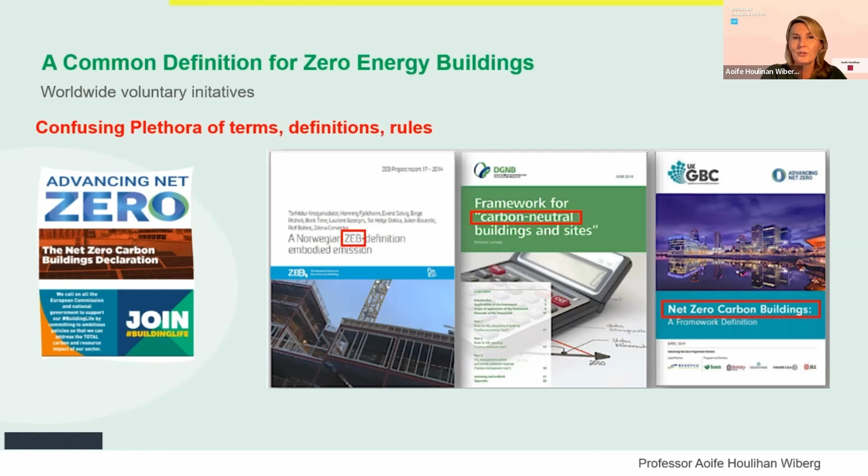So I just want to begin by saying the recent IPCC report stresses that to remain within 1.5 degrees, we need to reduce greenhouse gas emissions by almost 50% by 2030 and reach net zero by 2050. So a climate emergency has been declared. So the need for addressing whole life emissions towards net zero is emphasized in many schemes worldwide, whereas it's leading to a confusing plethora of terms and definitions.

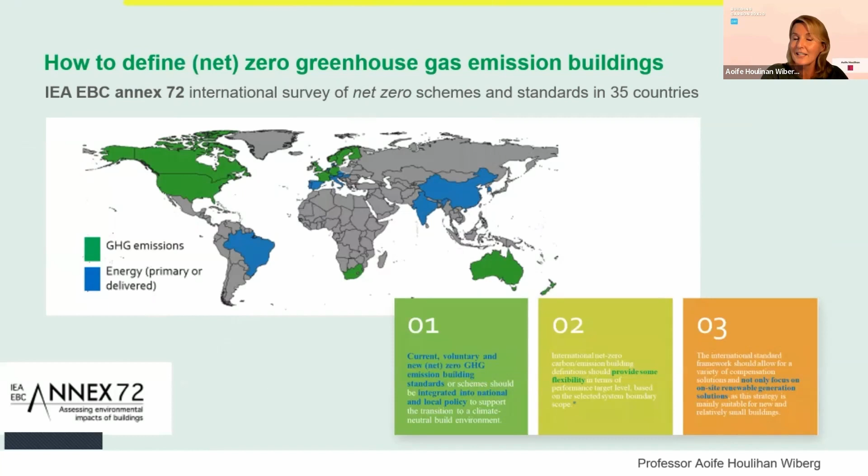So to address this confusing plethora, we in the IEA Annex 72 have conducted an international survey of net zero schemes in 35 countries worldwide. What we see is that energy is still the primary metric in 60% of those schemes, yet 40% have now shifted to greenhouse gas emissions. So I just want to share with you some of our experience from the Research Centre for Zero Emission Neighbourhoods and Smart Cities. So basically a Norwegian approach to achieving a national goal to achieve net zero.

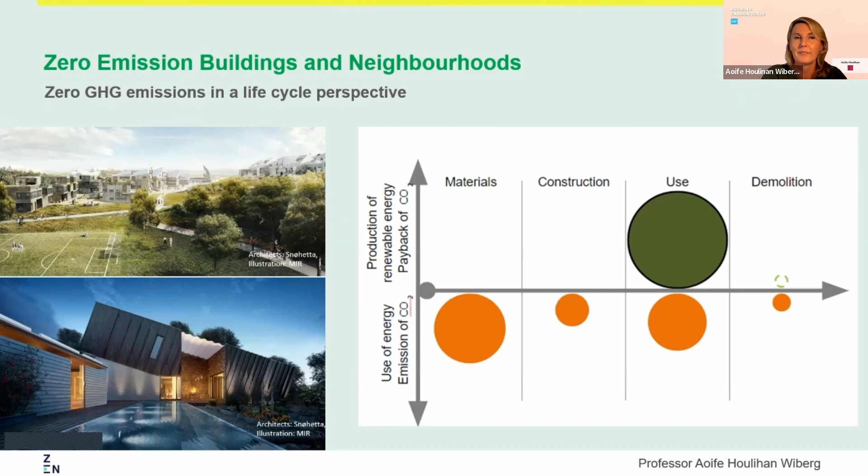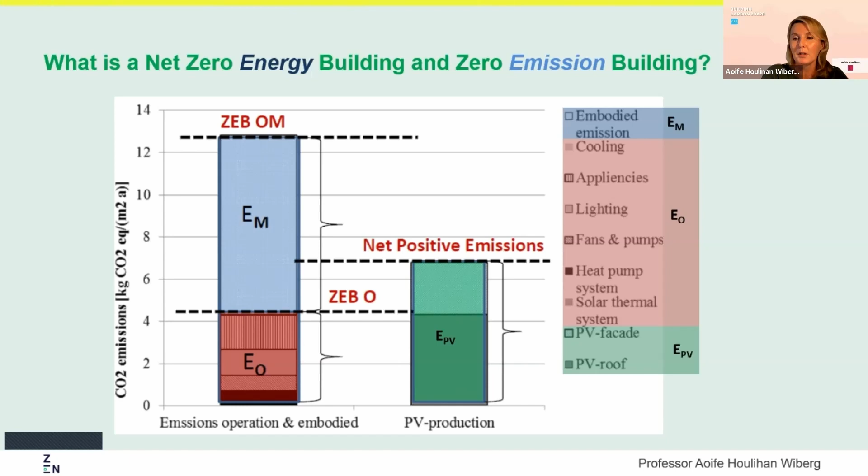So the vision of the ZEN Centre is to create buildings and neighbourhoods with zero greenhouse gas emissions. So effectively, emissions from renewable production must balance embodied emissions and operational emissions across the whole life cycle of the building. So a net zero energy building produces the same amount of energy as its demand. So the green balances the red shown in the graph. A net zero emission building, the balance is measured in terms of greenhouse gas emissions across the whole lifetime of the building. So it's including the blue part, embodied emissions.

In recognition that we're not all at the same scale, that went very fast, we created the ZEB Ambition Levels across the whole life cycle of the building. So it goes from the lowest, which is a balance for operational emissions, right through to the end of life.

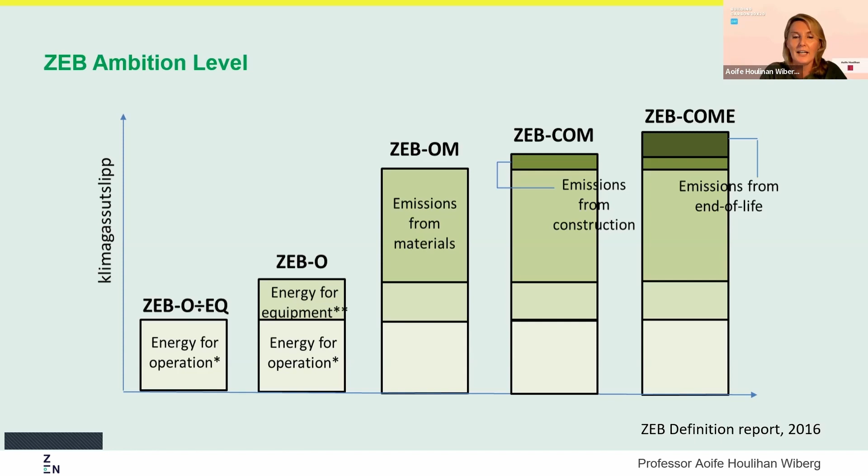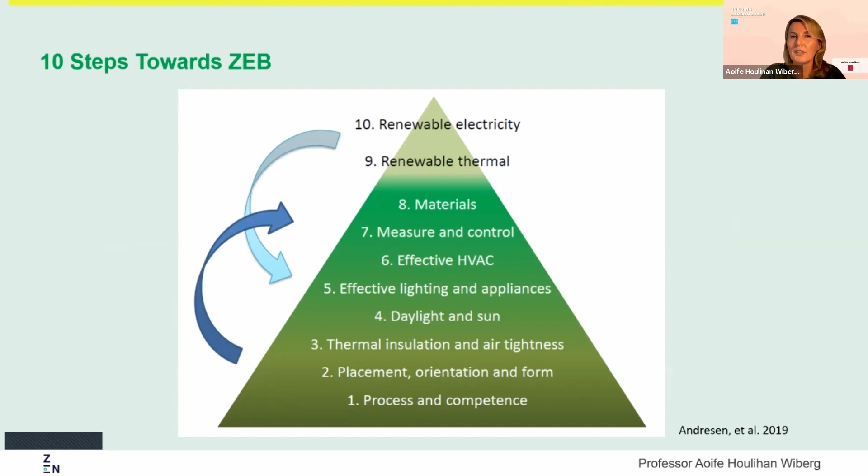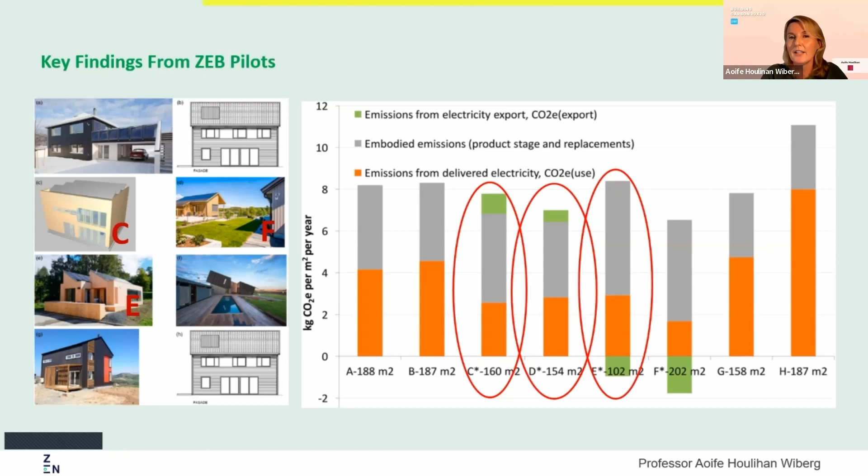So in terms of developing our ZEB pilot projects, we also have developed a stepwise approach based on Trias Energetica. But the key emphasis is always on passive design strategies, reducing energy as low as possible, and then balancing that with renewable technologies. So the importance of including embodied emissions is actually found in the results from our ZEB pilots. So we have 8 pilots which are built, and what you can see here is the orange is the operational emissions, and grey is the embodied emissions from materials. So we see a 70-30 split.

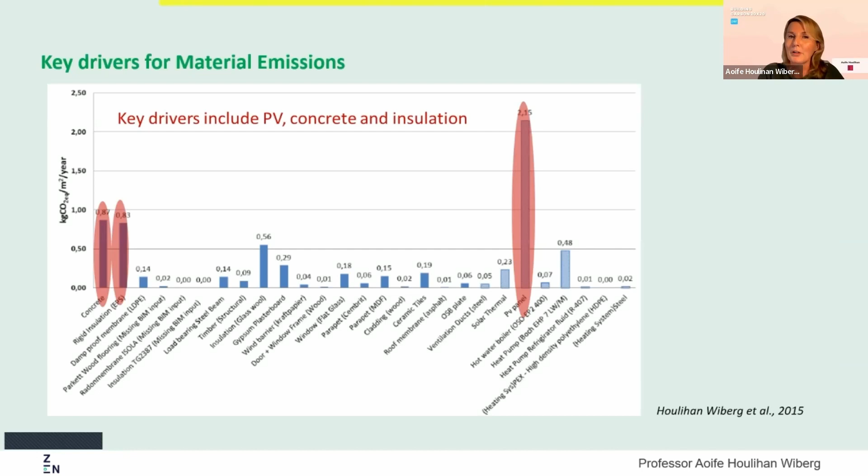Another interesting finding was that across all the ZEBs, we see that the key driver for high emissions was the PV, the concrete, and the insulation used. But obviously, as a designer, you need the PV, but you can reduce emissions across the other materials.

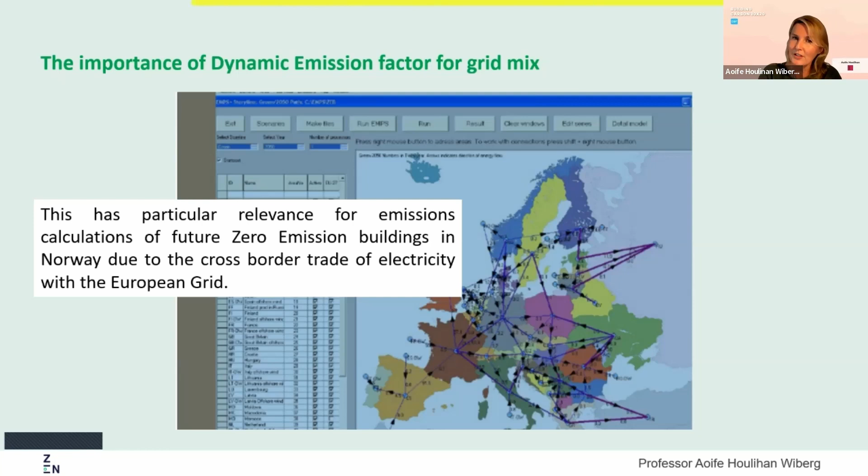Another important fact was that we needed to use dynamic emission factors for the grid mix, because even though Norway is almost net zero emissions for the grid, there's considerable export and import across countries, and we need to consider the future decarbonisation of the grid mix. So basically that slide is showing we need to consider the export and import of electricity in and out of the country, right through to Europe and back in again, which is higher carbon, and the future decarbonisation of the grid. So we use a ZEB emission factor.

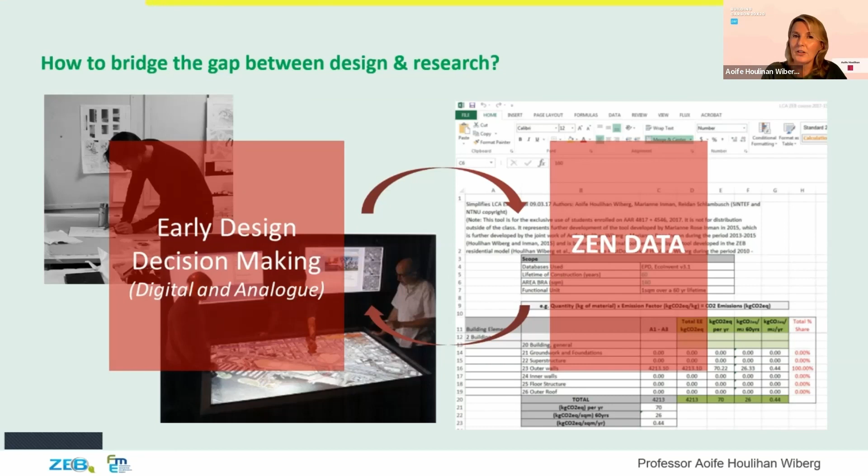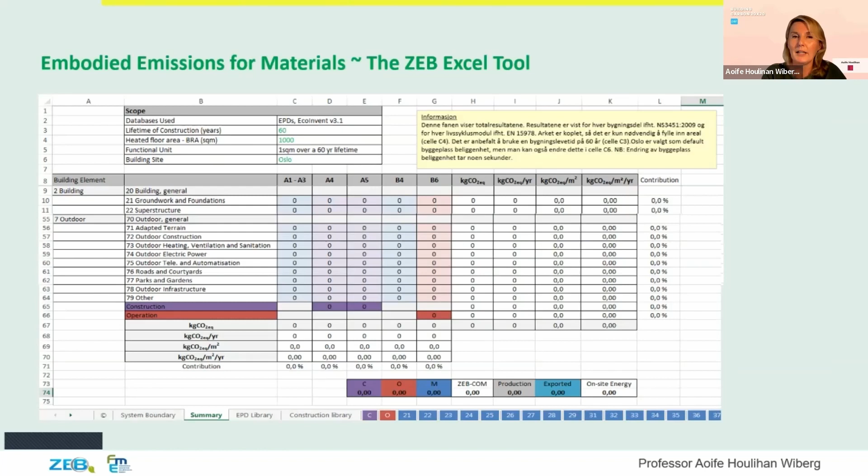So how do we bridge this gap between design and research? So we need to really find ways to use technology and to integrate robust calculation methodologies into the design tools. So over 10 years ago, I can't believe it now, I started with this development of an Excel-based embodied emissions tool. This is just showing version 1 of it. But this was really useful for us. Instead of having a black box approach, having the Excel allowed us the flexibility.

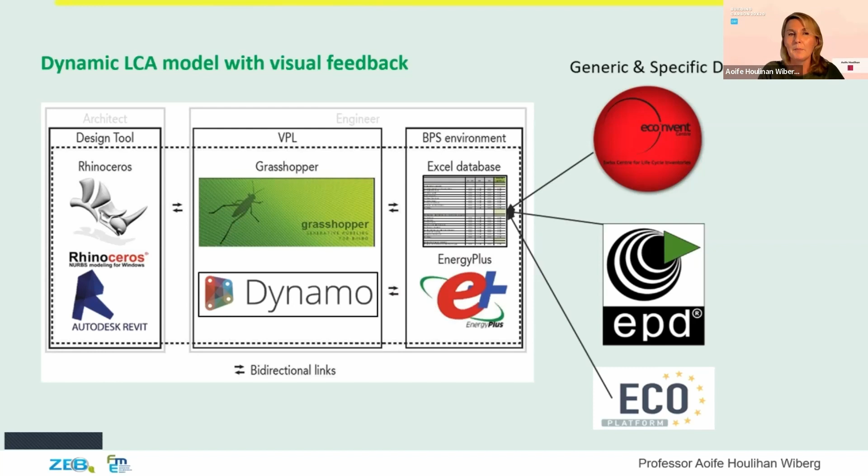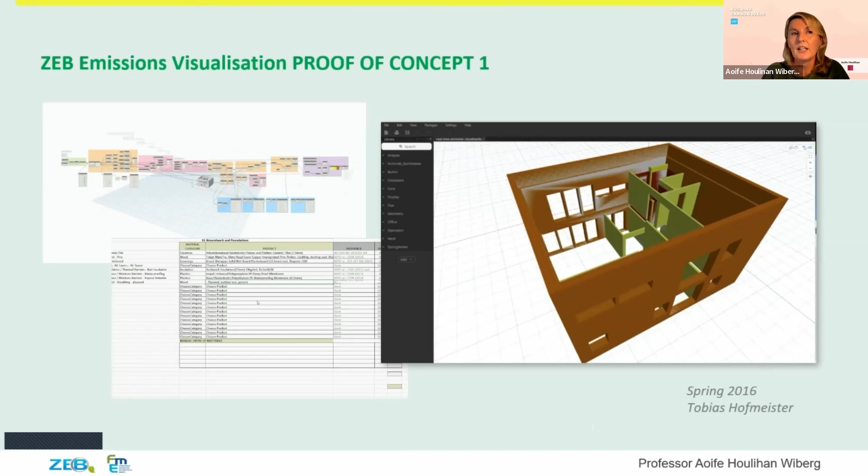The point with the Excel tool was it became the ZEB tool, which was then used to assess the performance of the ZEB pilots. Then we started to look at how we could dynamically connect that to 3D tools using scripting, and we also included EPDs and generic data. So I'm showing a series of slides here that show the evolution of this. So this is one early stage concept where we connected Revit BIM to the ZEB tool using Dynamo scripting and explored the use of color to communicate to designers about high and low emissions.

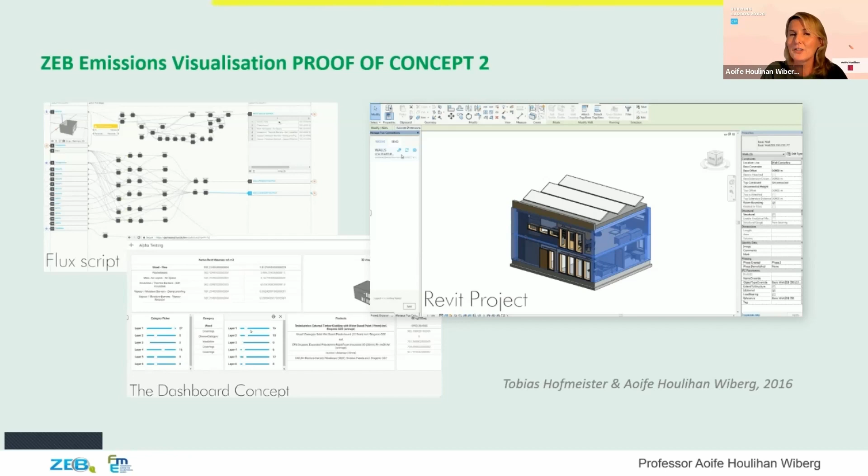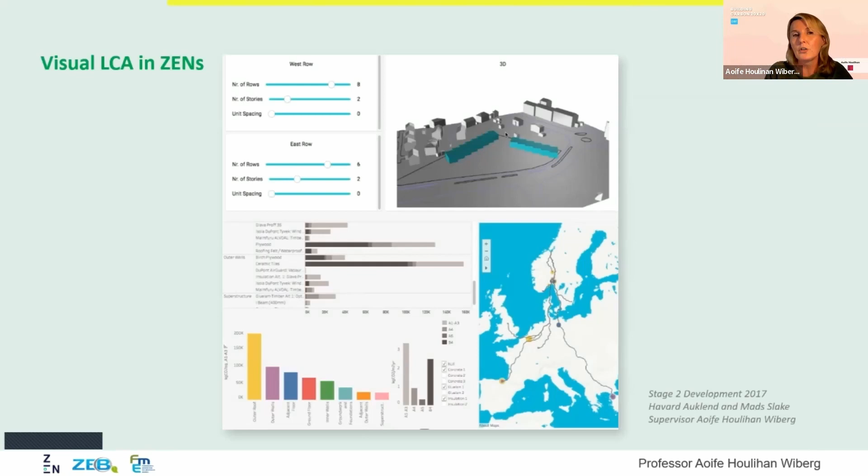The second stage was actually starting to work with a dashboard, so the user interface. Because for architects and designers, the scripting part is quite difficult. So the idea was keep the engine under the bonnet, but work with that interface side of it. And we also started to work with the use of sliders, which were connected to an EPD in the engine, but you could easily change the form of the building blocks and also look at the impact on embodied emissions of different locations of materials and how you show the impact for the transport emissions.

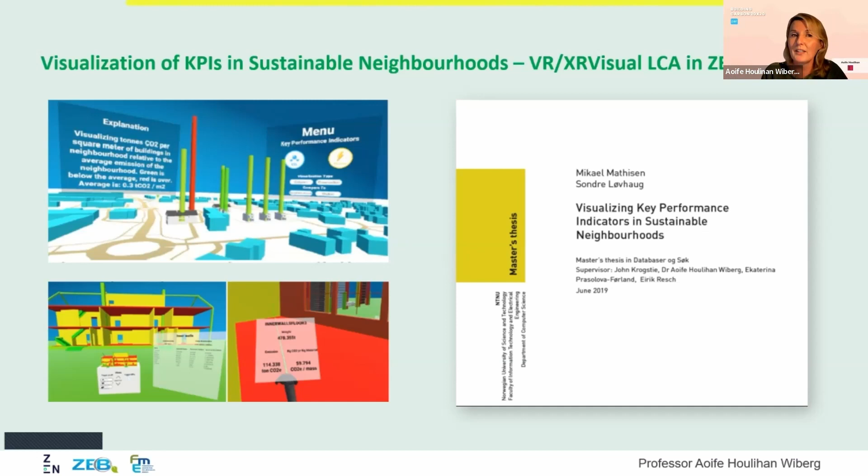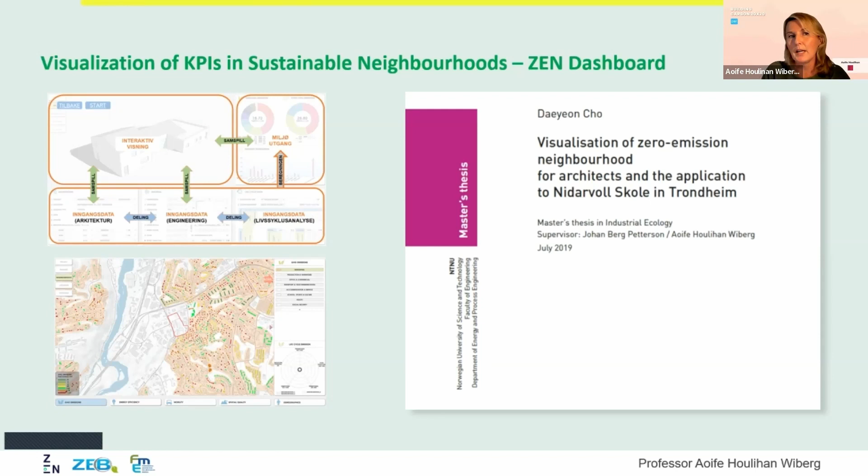Then I really started to think about, well, how do we cope with that shift in scale from building to neighborhood, and also the complexity with multiple KPIs, and how do we communicate to diverse stakeholders? So in these two projects here, we started to look at integrating virtual reality to engage diverse stakeholders. And here you're seeing a dashboard approach where we can easily, through the click of a button, shift from building scale right through, the bottom left is showing you neighborhood scale.

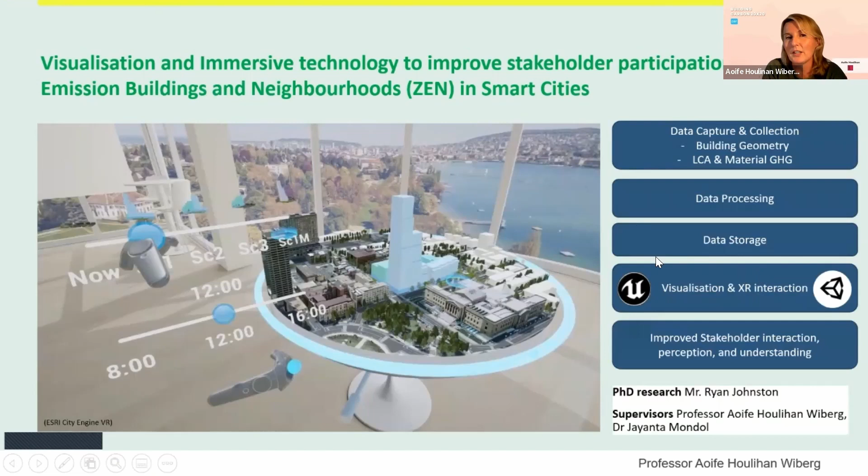So I currently have a PhD researcher who is working with immersive technologies connected to that engine that I spoke about before. And we're really quite excited about this work to communicate to diverse stakeholders.